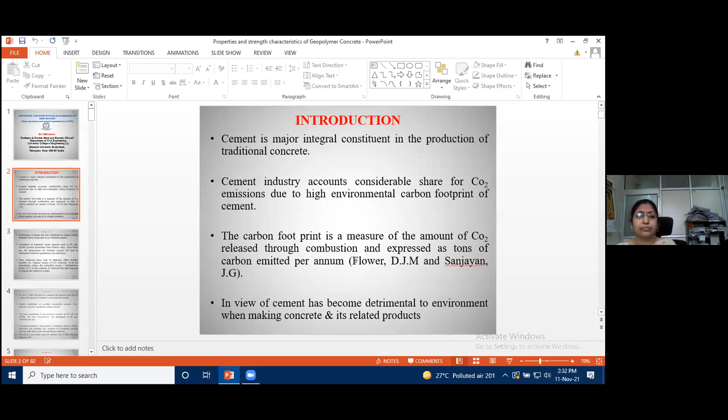He has been chairperson of ICI HYDC, Charminar Indian Concrete Institute, Telangana State, Hyderabad Center. Sir has published more than 70 papers in international and national journals and conferences, and has visited abroad for several guest lectures.

Sir holds memberships in different professional societies: ICI Indian Concrete Institute Life Member and Fellow Member, ACCE Association of Consulting Civil Engineering Life Member, and Institute of Engineers Fellowship.

Sir's awards and honors include the Best Guide Award by ICI and ACC National Level Cube Testing Competition in 2016, and the Best Academic Award by Smart Infra Engineering Services Trust on 2017, September 15.

Sir has edited many conference proceedings and books, and has done many consultancy works. He was nominated by Osmania University as a governing body member to Samskriti Institute of Business Management.

Sir was nominated by the Institute of Aeronautical Engineering, affiliated to JNTUH, as chair BOS in Civil Engineering member in September 2019. He is an editorial board member for the Journal of Building Engineering, a peer review journal, since August 2020, and also a National Advisory Committee member for the International Conference on Recent Advances in Civil Engineering Infrastructure.

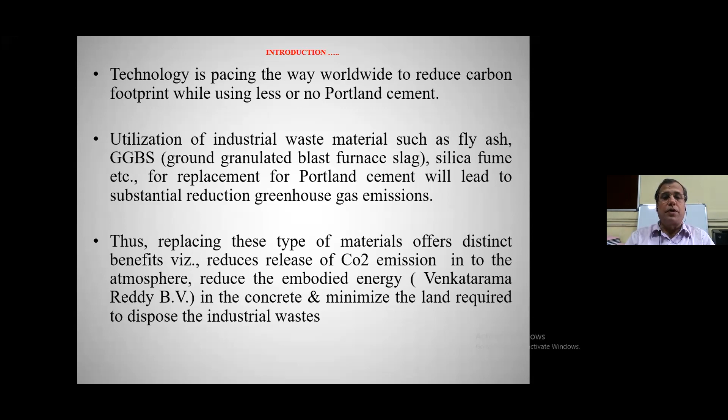Several researchers have done studies on geopolymer concrete using temperature limitations, producing the heat of hydration by giving temperatures. But that can be eliminated by using GGBS here, and I'll be explaining those things to you.

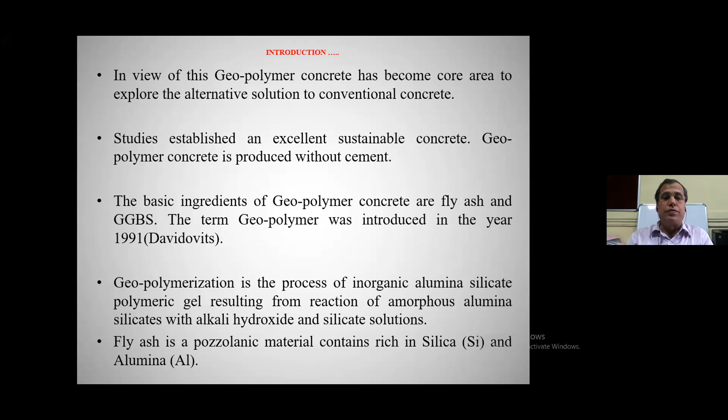Really, to get the heat of hydration, we need to have temperature. In concrete we have calcium silicate hydrate gel, which is the strength compound. To get this, we need proper curing in the concrete, and geopolymer concrete means we are putting 100% fly ash. When we are putting 100% fly ash, we need temperature. When we want to have temperature, we have problems, limitations. So to avoid this, we have selected GGBS as a replacement material to make effective geopolymer concrete in ambient curing conditions. We need not go to temperature curing, provided we are using GGBS into the concrete.

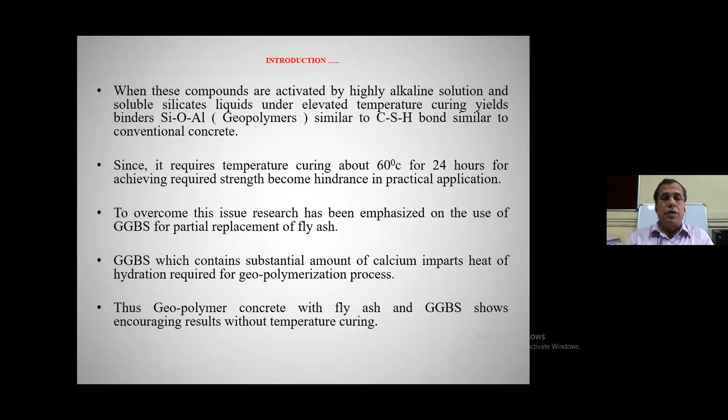So to start with, geopolymer concrete is a special concrete, and I told you why this special concrete is required.

Special concrete is required because we want to make our structures more durable in certain places, like water retaining structures, water tanks, and swimming pools. In these areas, we always have a problem of leakage and dampness, so we need a complete solution, and to some extent we must make durable concrete, for which geopolymer concrete is required.

This comes under special concrete because we are using 100% fly ash in this. Need for special concrete because we want to make our structures more stiffer, more stronger, more durable.

Applications of geopolymer concrete, as I told you, include water tanks, dam structures, drainage areas, and swimming pools. In such areas you can use geopolymer concrete in future, so that our leakage problem will be minimized.

The density of geopolymer concrete is very good because of the polymerization action, and because of the good workability from the alkali activators, which I'm going to explain to you—the different materials with which we are getting very good density.

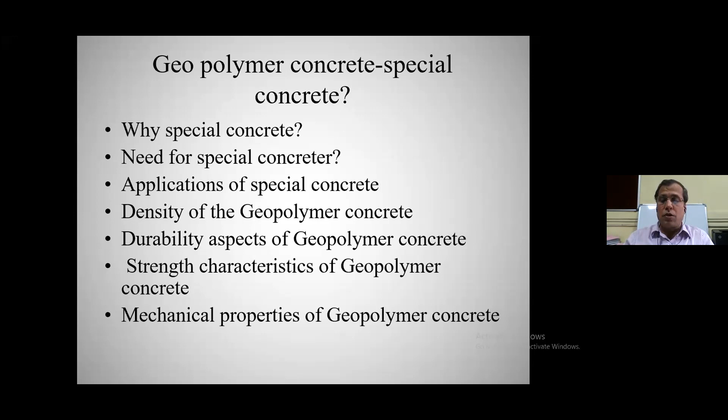Not only that, geopolymer concrete can be used with different coarse aggregate materials. It is also being done with recycled aggregate—our students are working on recycled aggregate geopolymer concrete, and we are getting good mechanical properties and strength characteristics. This is a sustainable material because fly ash is freely available at thermal power stations abundantly, and those materials can be used.

Types of special concrete are: fly ash concrete, fiber reinforced concrete, bacteria concrete, self-curing concrete, ultra high strength concrete, self-compacting concrete, and geopolymer concrete.

What are special concretes used for? A normal concrete with which we can survive—but why are we making special concrete? Special concretes are used for special applications like tunnel structures, water retaining structures, raft foundations, and wherever you have high load carrying capacity bridges and high-rise structures, for which we need all these special concretes.

Fly ash is one of the materials which is a very good sustainable material, because fly ash fineness is more than cement fineness. This fineness is very good for fly ash, and it helps in densification of concrete, achieving good target strength, minimizing temperature problems in concrete, and giving better durability in concrete. So this is a very good special concrete, fly ash based concrete.

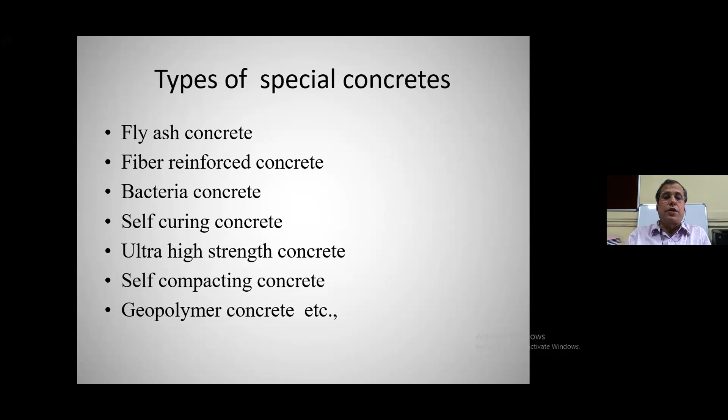These are all the things that I wanted to tell you about special concrete.

Now we are having the materials used for geopolymer concrete. Fly ash can be used, along with fine aggregate, coarse aggregate, water, sodium hydroxide, sodium silicate, potassium hydroxide, and potassium silicate. The combinations we can use are: sodium hydroxide with sodium silicate, or potassium hydroxide with potassium silicate.

But the thing is, sodium hydroxide and sodium silicate is a little cheaper, while potassium hydroxide and potassium silicate will be costlier. That's the reason why almost all researchers select the first option only. We can select the second option too, but why unnecessarily give more cost for the material? Of course, combination of the above materials can be called the alkaline liquid, the combined material.

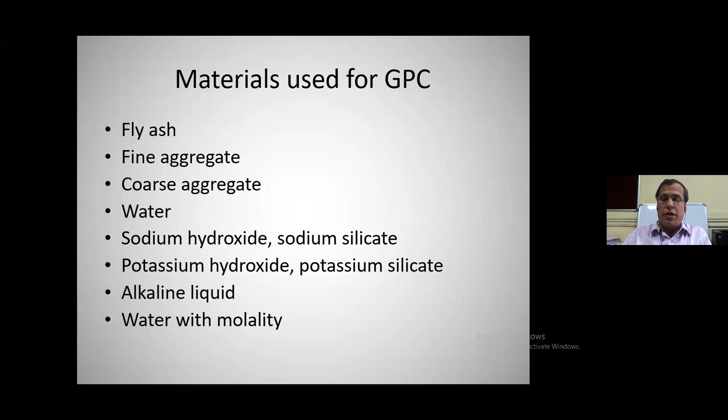Then water with molarity we use. And of course, we have very good workability. As I told you, we can observe slump, compaction factor, and cohesive mix. Good slump, good compaction factor, cohesive or uniform mix, good quality due to different ingredients and materials present, the alkali activators as I told you. Uniform matrix in fresh concrete state, good density, and good particle packing etc. is possible in geopolymer concrete.

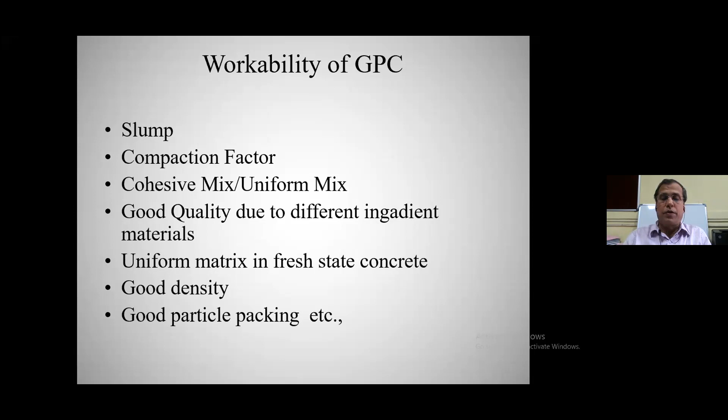For curing, 100% fly ash based GPC requires 60 to 90 degrees temperature curing, but GGBS based concrete requires approximately 43 to 50%. That is the percentage of GGBS required in GPC. Beyond that, it again decreases the strength. This is what we observed in our investigations. Hence it's preferable to go with ambient curing with the above GGBS 43 to 50% in fly ash.

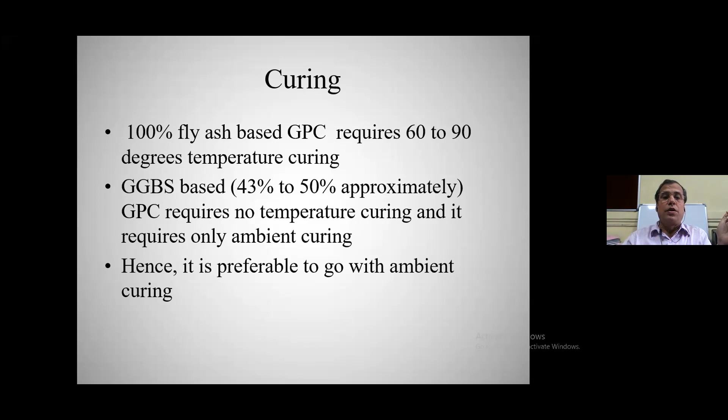Attainment of strength, more rate of hydration due to alkaline liquids, more hydration process due to GGBS, more rate of gain of strength at 3, 7, 28 days, because of alkali activators and faster heat of hydration. So we are getting maximum strength even at 7 days sometimes for very high strength concrete. But it's better to keep it till 28 days so that our normal FCK is obtained at 28 days.

That is what we have observed, and we are also waiting till 28 days for the specimens. It is not necessary for the specimens to cure under water. It is only ambient curing - you can leave the specimens in the atmosphere after making them, and test after 28 days.

There are more advantages in low grade concrete and less advantages in high grade concrete, as I told you. High grade concrete is more brittle in nature. Therefore, the parabolic portion of the modulus of elasticity behavior in geopolymer concrete relates to the elastic proportionality limit. You can see more proportionality limit portion for high strength geopolymer concrete.

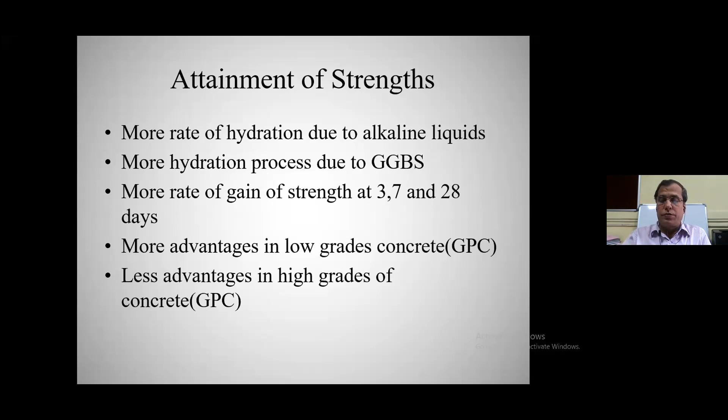This is the observation, and you can get the strengths after 28 days. You can also see short-term and long-term properties. Short-term properties are very good - after 28 days we are able to get the target strengths. For long-term properties, some researchers have done durability studies which are very good, with no negative effects reported for geopolymer concrete as of now by researchers worldwide.

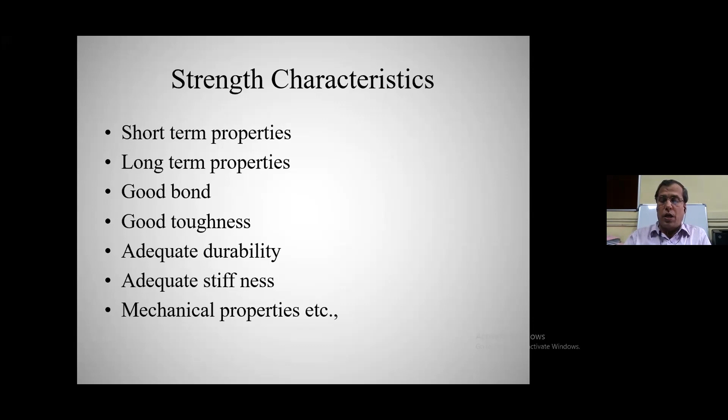So good bond, good toughness, adequate durability, adequate stiffness, and good mechanical properties - all these are achieved for geopolymer concrete.

It is necessary that we establish the grades, and some of our research scholars did work for several grades, because if you do not establish the grade, it is highly difficult to know the proportions and the replacement percentage of GGBS etc. Several researchers, including our MTech and PhD students, have done work on M20, M60, and 70, 80 is also in progress. I am not reporting the results of 70 and 80, but till 60 we have some results from our MTech students and PhD scholars, so I am going to show those results to you. Good mechanical properties - all mechanical properties are very good.

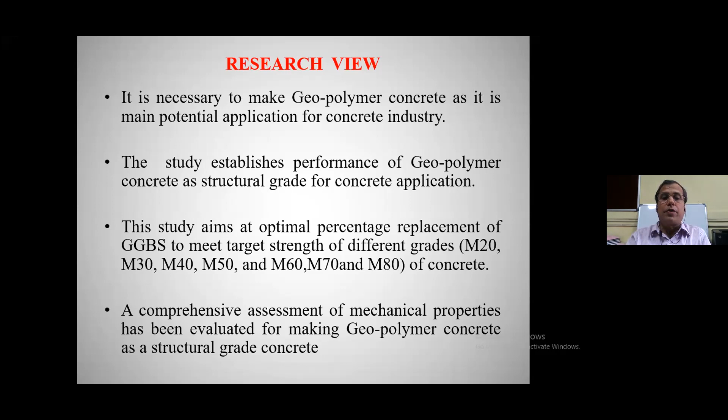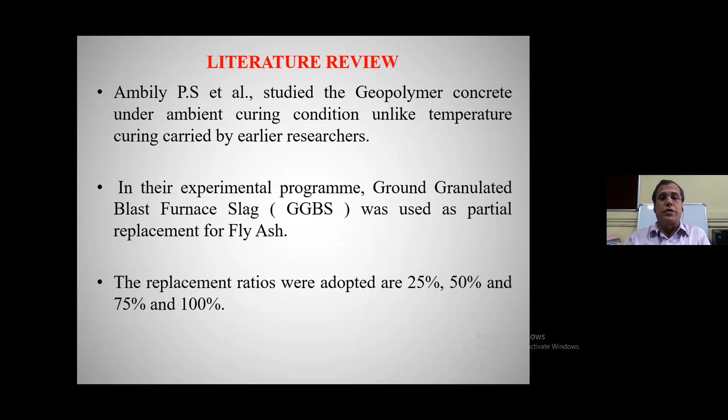Some of the literature reviews also say the same as what I told you - GGBS is being used, but not for a particular grade. They have used some percentage of GGBS and gotten some amount of strength, but have not reported that this particular proportion is for this particular grade. Several people have replaced 25%, 50%, 75%, 100% fly ash with GGBS, but they have not really concluded with the grades. That's what several researchers have done, I don't want to repeat all these things.

So the experimental program which was planned and conducted, the studies at our department also - I want to show you some of the results for M20, M60, M70 and M80 also.

GGBS replacement that our students have taken up to M60 is 9% to 43%, and even up to 50% for very high grades like 70 and 80. But up to M60, the 9 to 43% GGBS replacement gets us the required target strengths.

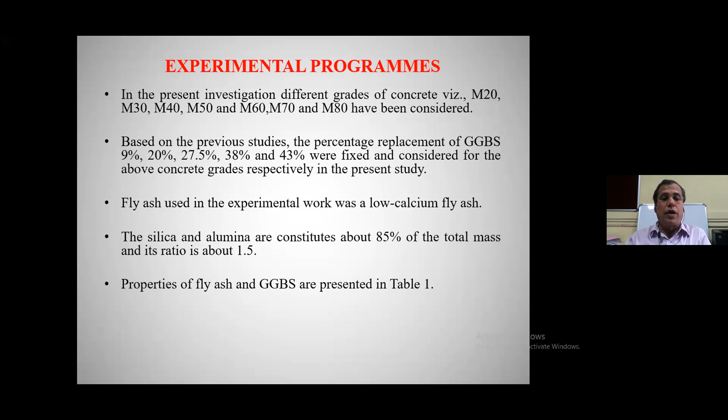We have basic advantages here. Alumina and silica are considerably high, about 85% of the total mass of the fly ash, and that is the reason why we are able to get the required strength.

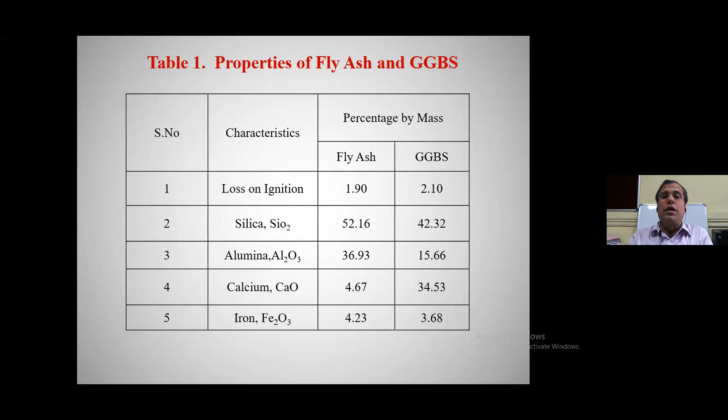You can see some properties of fly ash and GGBS. Loss on ignition is 1.9 for fly ash and 2.1 for GGBS. Silica is 52 for fly ash and 42 for GGBS. Alumina is 36.93 and 15.66 respectively. This is how GGBS helps us get better heat of hydration, so that we can achieve ambient strength without going for temperature curing.

The materials used here include locally available river sand, whose properties like specific gravity and fineness modulus are given. Natural fine aggregate and natural coarse aggregate can be used directly, no problem. But a separate mix design procedure needs to be followed, for which we need sodium hydroxide and sodium silicate, or potassium hydroxide and potassium silicate, any of these two combinations, to get the required target strength for a given grade.

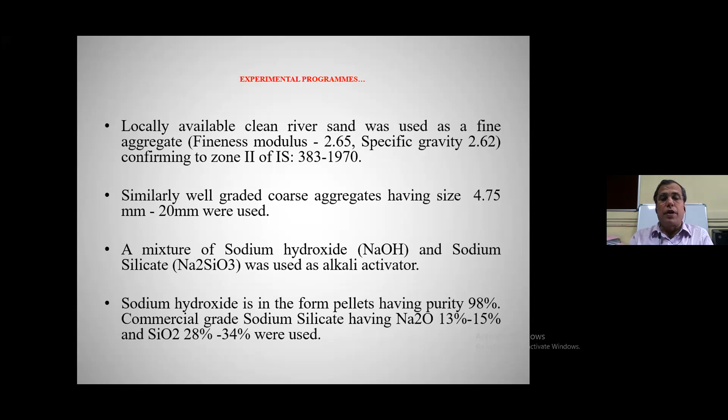Typically, the common alkaline liquids used in geopolymer concrete are sodium hydroxide and sodium silicate, or potassium hydroxide and potassium silicate. But it is always better to take the sodium option so that your cost is minimized. Otherwise we will unnecessarily go with high cost, which is not preferable for any construction or mix design.

We have a process for making the materials, sodium hydroxide and sodium silicate, for which we purchase flakes with 98% purity from local suppliers. Sodium hydroxide solution is prepared by dissolving the flakes according to the required molarity. 1 kg of 8 molarity sodium hydroxide needs a certain amount of water and 262 grams of flakes. There is a standard procedure to prepare and mix the material 24 hours before.

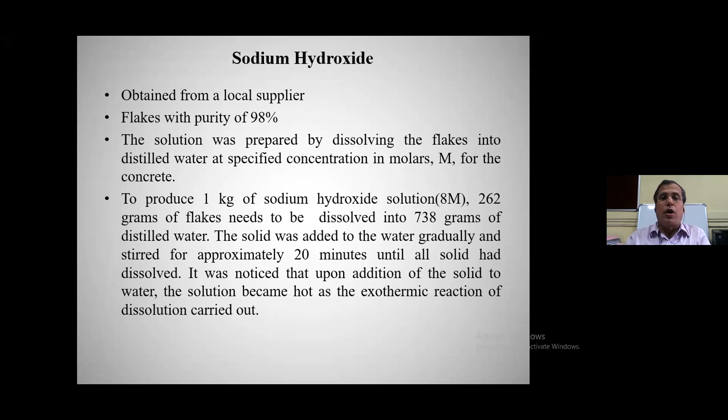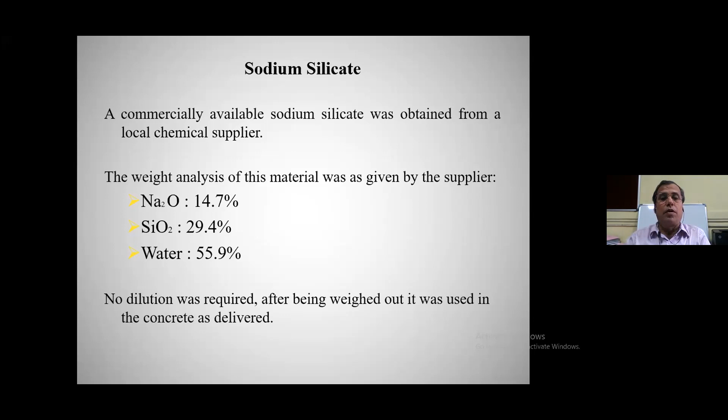Suppose you are casting tomorrow, you need to add all these materials today. There is also a weight analysis for the materials used: Na2O is 14.7%, SiO2 is 29.4%, and water is 55.9%. This is the procedure given in the mixing process of geopolymer concrete.

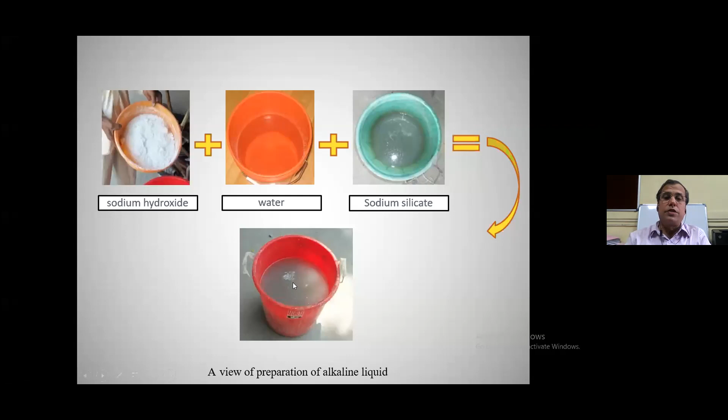This is how the proportions look. The different materials you add are sodium hydroxide, water, and sodium silicate, which together give you the alkaline liquid. At the bottom you can see the alkaline liquid made of sodium hydroxide, sodium silicate, and water.

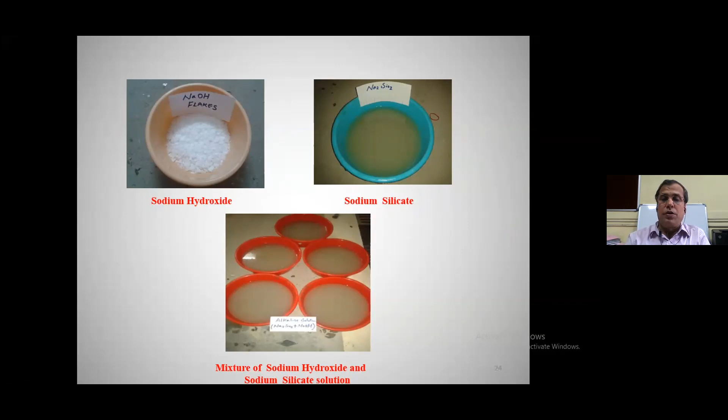Here's another picture showing the same thing, but with different proportions for, say, 3 cubes, one percentage, another percentage, and so on. You can plan this for different grades by mixing the material 24 hours before the planned casting, one day before, including the fly ash and GGBS materials.

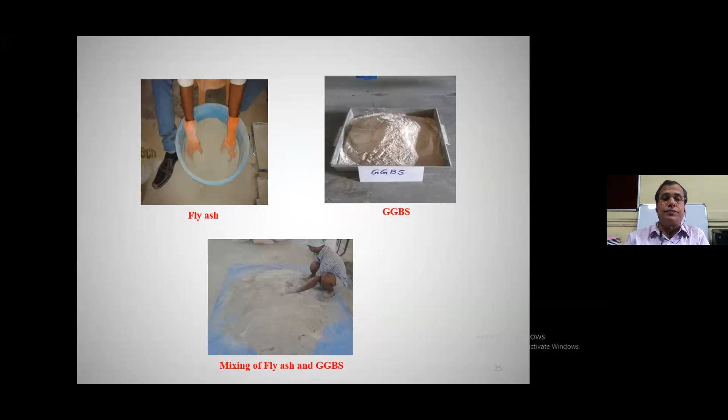This is how both materials are mixed. It is a beauty that our fly ash and GGBS are very fine, and with these finer materials we get very good workability. It is like normal mixing: first we put coarse aggregate, then fine aggregate, then fly ash or cement, and mix it in a dry state.

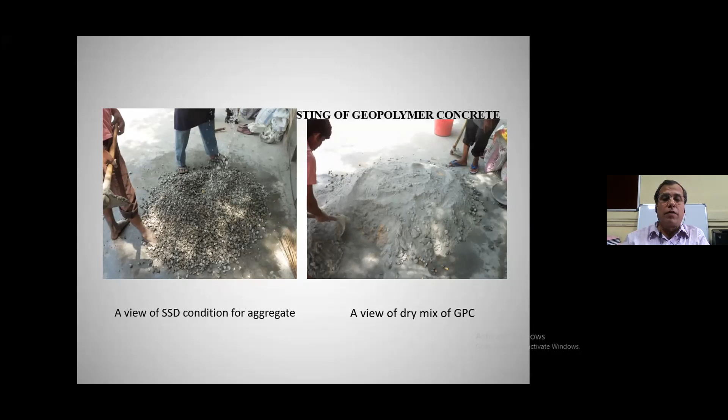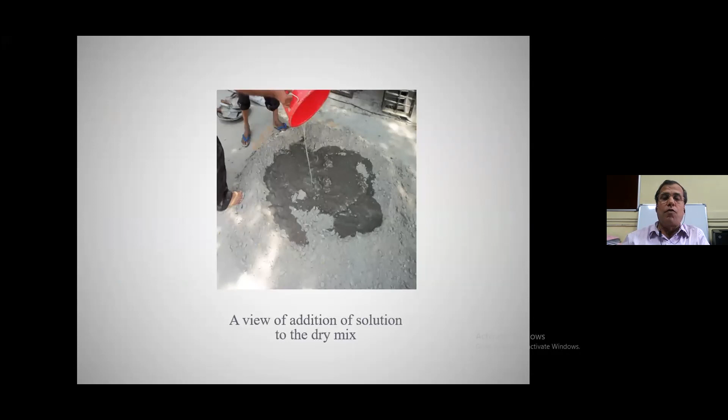Then we add the water or alkaline liquid solution after the dry mix. This gives the liquidity or lubrication we can achieve in our concrete, so there is no scope for any honeycombing or gaps. It is a very beautiful concrete.

Its color is also like normal cement concrete, gray. It is very good, and if you can do a good mix design, I am sure you will get good strength.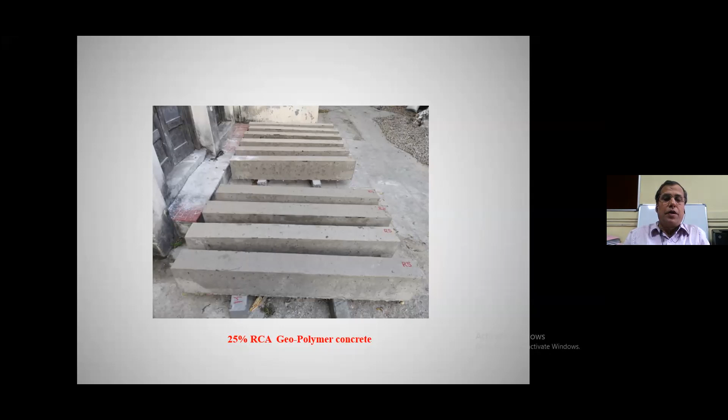Our student is going to start now testing for load carrying capacity and moment carrying capacity of these beams. The beam is 1.5 meter, 1500 mm by 230 mm by 150 mm.

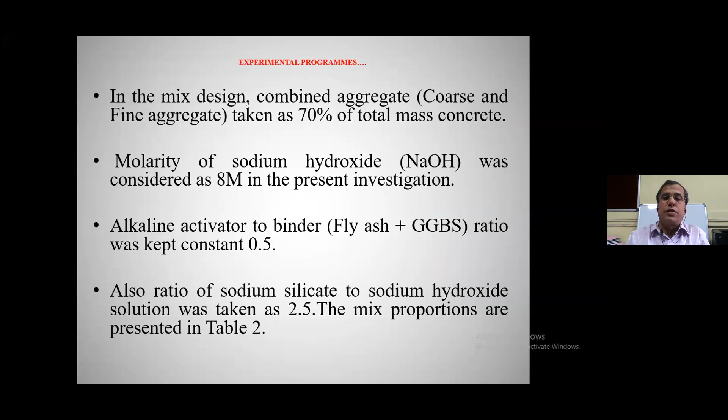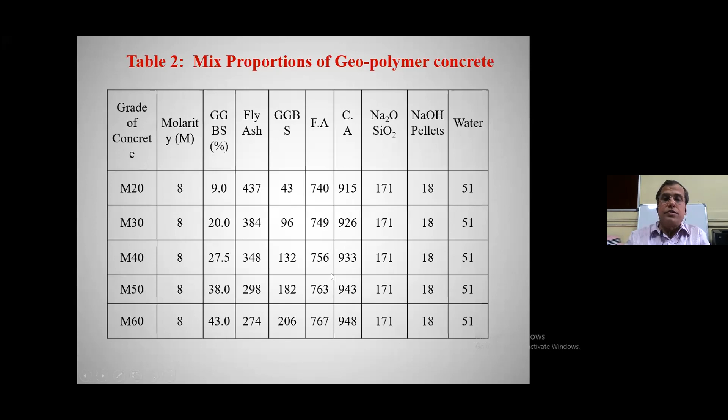Improved workability is also very good, as I told you earlier, so I think we need not discuss this further. This is one of the mix designs with 8 molarity, and GGBS percentage is 9 to 43. This is again done by our research scholar, with fine aggregate, coarse aggregate, sodium hydroxide flakes, pellets, and water taken for these grades. This is the proportion of the mix trials that we got for M20 to M60. This procedure I have already explained to you.

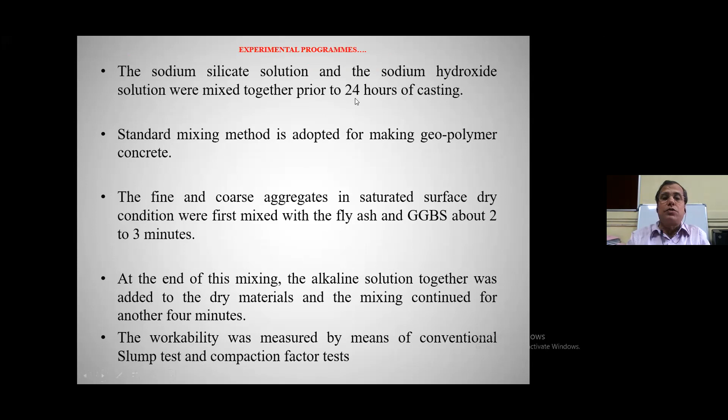24 hours prior, we have to mix all those materials, as I told you. We need to have a minimum temperature of 25 to 27 degrees, which is just room temperature. So it means in the ambient situation only we are going to get this.

Earlier we have done research at our laboratory. When GGBS had not come, we used to make the geopolymer concrete in midsummer when temperature is around 50 degrees, and we used to keep all our specimens outside after making them, exposing the cube, cylinder, and prism specimens to that temperature. We were struggling a lot. Then when GGBS came, we started using it, and in ambient curing situation only we are able to get the results.

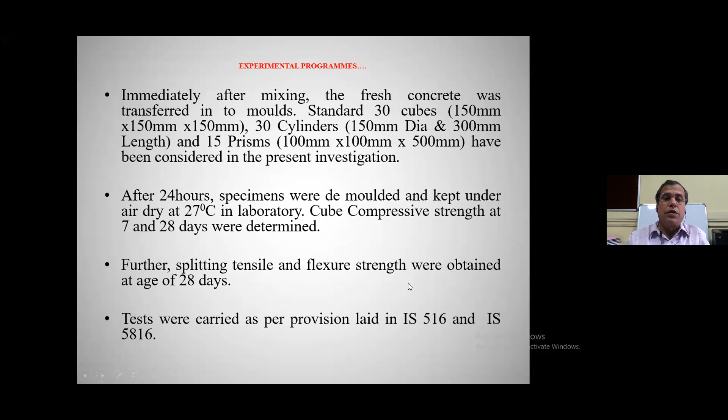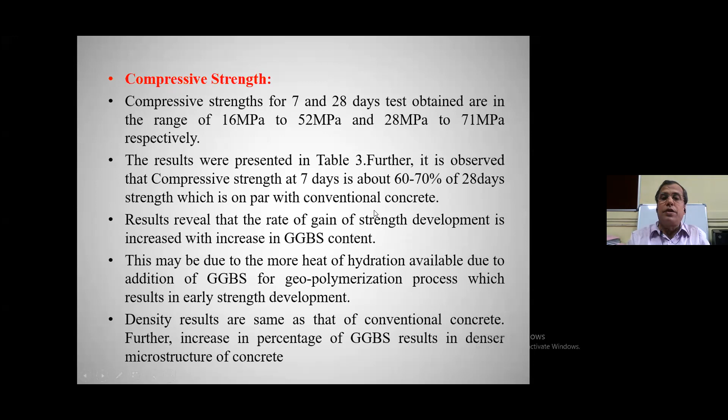These are our standard cube, cylinder, and prism specimens, tested at 28 days according to the standards. The compressive strength we got for M20 grade concrete achieved the target value of 28, and for M60 it was 71. So this is in the range of 28 to 71, meaning all the target strengths are being achieved. GGBS is working very well, and even the 60 to 70 degree temperature requirement is eliminated by using GGBS. These are the strengths we got, 28 to 71.

So what is the target strength for M20? We know it is 26.6, nearly 27, so we are getting here more than the target required for M20. Any grade you take - M20 means 30, 30 means 40, 40 means 50, 50 means 60, 60 means 70 - plus 10 MPa is our target strength when you use the target mean strength formula: Ft equals FCK plus T into S, where FCK is characteristic compressive strength, T is the statistical constant for 20 millimeter size aggregate, and S is the standard deviation of that particular grade of concrete, with which we are supposed to get plus 10 MPa strength for every grade.

When you are taking 20, 30, you should nearly get it - 28 means the target is 27, 26 point something you are reaching. That is a fundamental thing we can remember. When designing one particular grade, you should get plus 10 MPa - that is our target strength, and we achieved those target strengths for all grades with these particular replacements of GGBS.

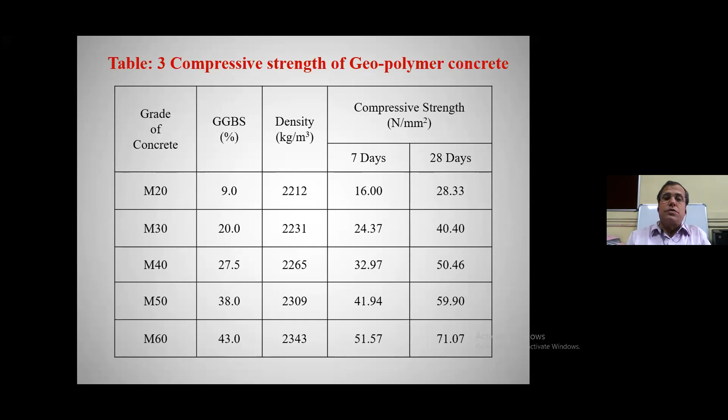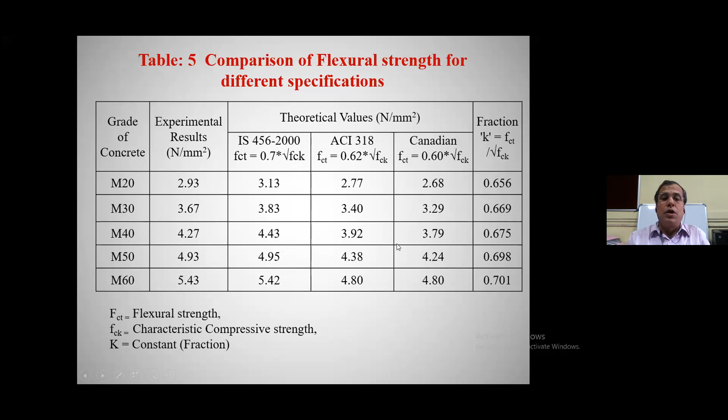These are all the test results I told you - good in compression, good in splitting tensile strength, good in flexural strength, and good in modulus of elasticity at M60. This is how we can understand all the material characteristics, and they have also tested with other country codes, and the flexural strengths have been verified with other country codes, well within the limits.

After making the geopolymer concrete, we cannot just leave it - from M20 to M60 or 80, we cannot leave it alone like this. We have to use this concrete for design. When we want to use this concrete for design, we need to have a procedure again. So what is the procedure that we require?

Normally, we design RC beams for ultimate moment of resistance using our conventional formula: Mu equals 0.138 FCK BD square or 0.133 FCK BD square. Earlier we used 0.138 FCK BD square, but now our formula is 0.133 FCK BD square, because we are not using 415 grade steel or 250 grade steel. We are using Fe 500, 550, 550D.

Why are we using these steels? These are advanced steels with good ductility, and the manufacturing process has changed. Therefore we now use Mu equals 0.133 FCK BD square, not 0.138 FCK BD square, for which we have well-defined equations. But this 0.133 or 0.138 is for normal conventional concrete.

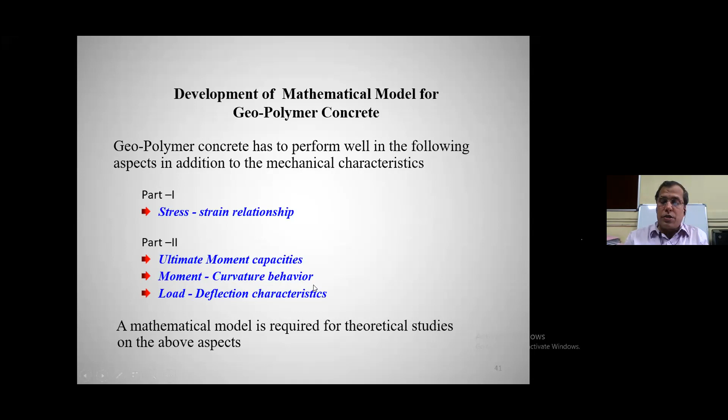This is done to arrive at the moment of resistance equation. Using stress-strain relationships, we can get ultimate moment capacities, moment-curvature values, and load-deflection characteristics for geopolymer concrete. This is the stress-strain relation for geopolymer concrete that we obtained.

We normalized the stress-strain relations. A smooth curve resulted from non-dimensionalizing and normalizing the values from 10% to 100%. We predicted the equation of this parabola: y equals ax by 1 plus bx plus cx square, that is f equals a epsilon by 1 plus b epsilon plus c epsilon square. Here y is stress and x is strain. We selected this equation to get the stress-strain relations in non-dimensional form.

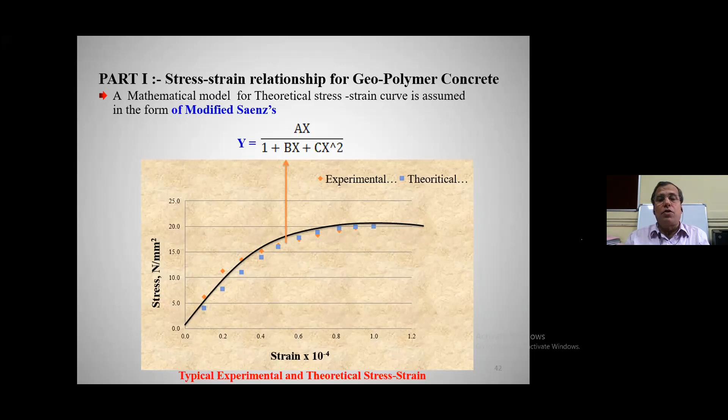First we normalized the curve, keeping values at 0.1, 0.2, 0.3, 0.4 up to 1, to get a smooth curve. From our experimental values, we predicted this parabolic curve for a grade of concrete, but this curve is normalized, and it will vary from grade to grade.

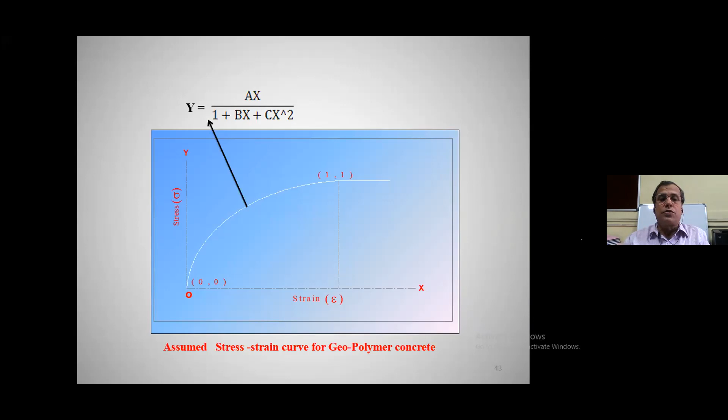This curve value varies from grade to grade, and for each grade, once obtained, Mu equals 0.138 or 0.133 FCK BD square can be derived by integrating the equation of this stress-strain curve. We get the area of the stress block under the curve, and from this area we get the compressive force. That is how the investigation was done for various grades.

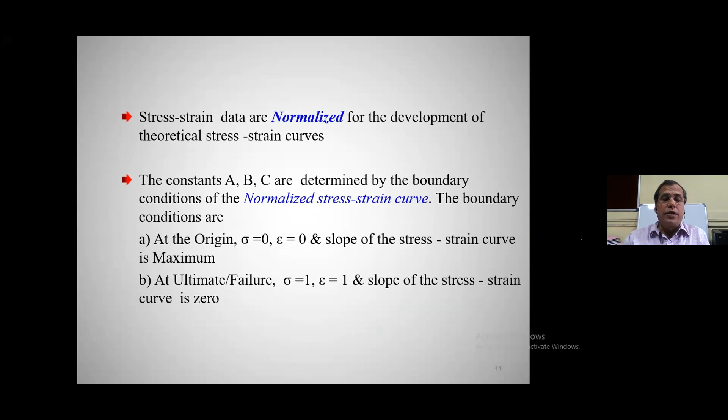F is nothing but sigma, which is stress, and epsilon is strain. Boundary conditions were given for the ultimate value, starting from 0.1, 0.2, 0.3 up to 1, and similarly for strain. Suppose 25 MPa is obtained for M20 grade concrete: 25 MPa is normalized to 1, 90% becomes 0.9, 80% becomes 0.8, and so on, normalizing the ultimate values to obtain the stress block parameters.

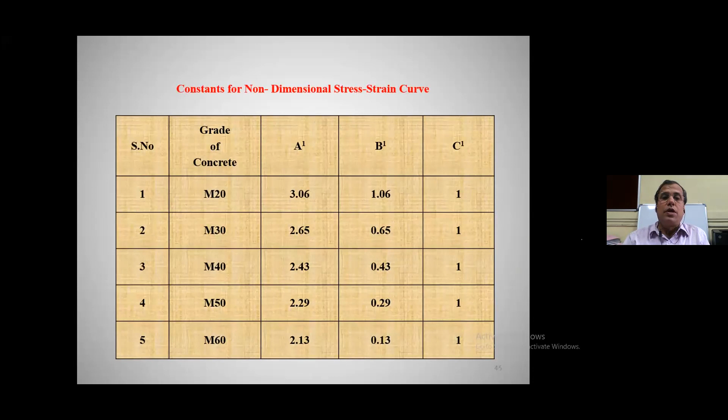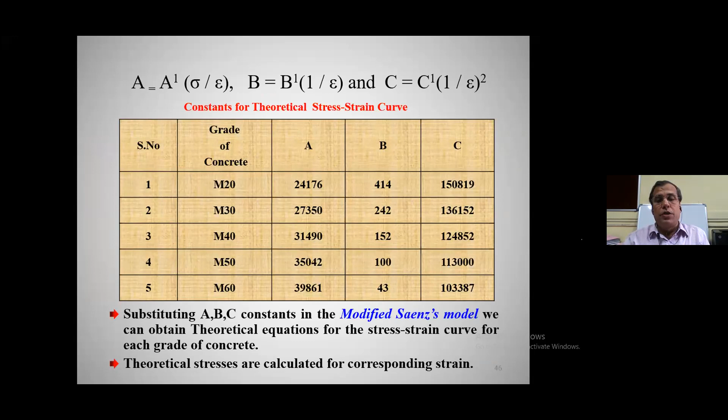In this equation you have A, B, C constants, and these constants are arrived at for different grades of concrete using the procedure. A is calculated as A dash sigma by epsilon, which is stress by strain; B is calculated as B dash 1 by epsilon; and C is calculated as C dash 1 by epsilon square. These values of A, B, C and A dash, B dash, C dash are obtained for every grade, normalized, and then verified.

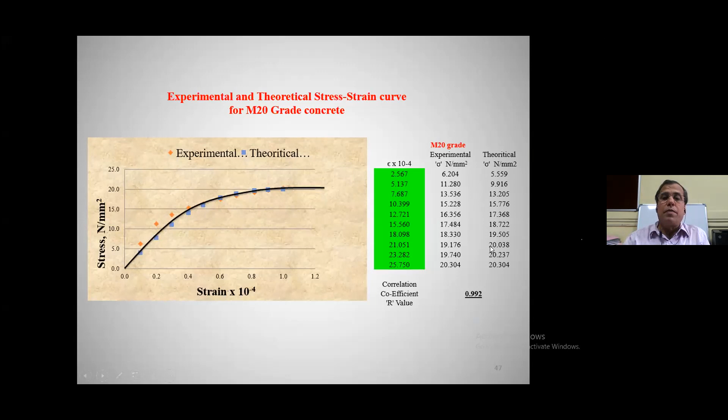This is the ultimate value, as I mentioned, with normalized values at 10% intervals for each level, obtained for all grades. The point here is that we have conventional stress block parameters like alpha, beta, gamma, xn by d, depth of neutral axis, compressive force, and the center of gravity of the stress block from the compression zone, giving moment of resistance as 0.133 FCK BD square.

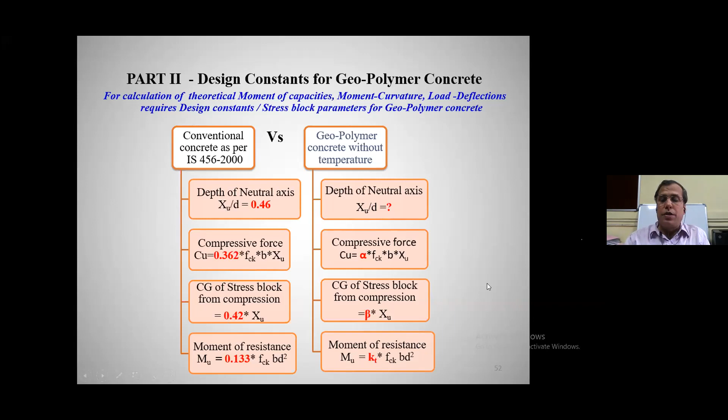We have this for conventional concrete, and we need the same for geopolymer concrete, for which the investigation has been carried out. The equation is idealized, and the M20 grade concrete stress-strain curve is superimposed onto the RC section.

When we superimpose the strength characteristics of M20 grade concrete onto the RC section, then on that RC section, whatever moment of resistance we are going to get is for that geopolymer concrete, for which we have superimposed all the stress strain curves onto the RC section one by one for M20, M30, M40, M50, M60.

We calculated C1, C2 compressive force in parabolic section and compressive force in rectangular section. This stress strain curve is divided into rectangular and parabolic parts, and compressive force C is nothing but C1 plus C2. The depth of neutral axis for ultimate load has been arrived at.

So that depth of neutral axis we can know, and then tensile force we can know from the geometry of our calculations. Similarly, compressive force we can get. If we get compressive force and tensile force, we have also taken a balanced section.

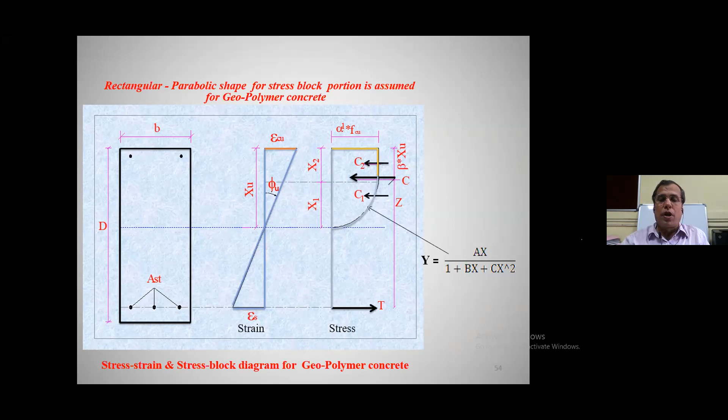For our experimental work, and also theoretically, a balanced section for this theoretical case. So that moment and curvature, this moment and curvature we can correlate, and we can really compare the values for which these stress block parameters have been taken. These are the constants which I told you, and this is how a section has been taken, RC section.

This is the expression for compressive force. I have shown you the beam, that beam is 1.5 meter beam. Experimentally, moment is arrived at. For example, with the ultimate load, moment we can calculate, with 2-point load. Moment we can get it with the reactions. Force into perpendicular distance is your moment of resistance, we can get it.

But theoretically also we should get it, so theoretically also the same geometry has been assumed. For the same geometry, whatever stress strain curves are being superimposed onto the RC section, theoretically compressive force and tensile forces have been arrived at. To arrive at the theoretical compressive and tensile forces, this process has been done.

B is 150, D is 230, and L is 1500. The compressive force is alpha 1 FCU B into XU, where you are having area of the stress strain curve, that is AB, given by AB equals alpha 1 FCU epsilon U. Alpha 1 is also calculated, and then the expression of the compressive force is arrived at like this from these equations, where AB is the area of the stress block under the curve, area of the stress strain curve.

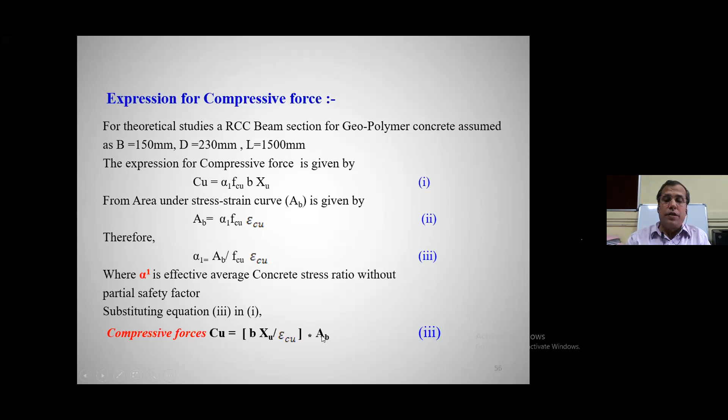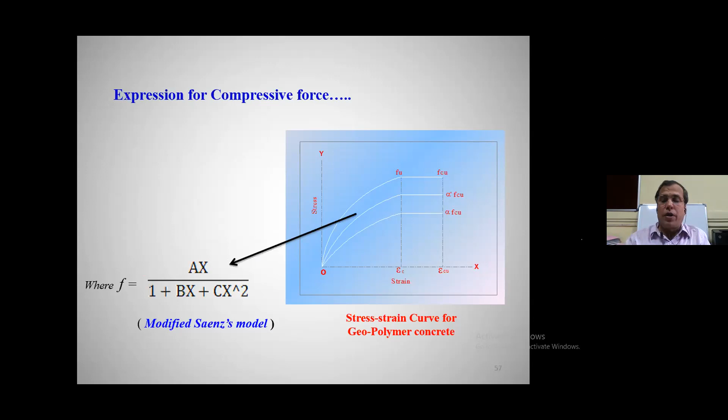To get this area of the stress strain curve, because it is in parabolic shape, we need to definitely integrate this equation. If we are able to integrate this equation, we are going to get the compressive force area, and if area is known to us, we can get compressive force. So AB needs to be integrated, this F, stress.

We have taken an equation, stress equals AX by 1 plus BX plus CX square. It is nothing but F is equal to A epsilon by 1 plus B epsilon plus C epsilon square. This is the expression that we are going to get.

Why I'm explaining all these things is because we are getting the compressive strength of geopolymer concrete, and unless we calculate the design parameter of that particular M20 grade concrete, we are not able to design the RC beam. We need to design an RC beam of that particular M20 grade concrete in RC section also. Our job is not just to arrive at the target strength of the geopolymer concrete and leave it. No, we need to show how you are going to design completely for RC section geopolymer concrete.

Compressive strength alone will not be sufficient; its behavior in RC section will also be different. To arrive at the uniformity and to get the correct design parameter, we need to compulsorily superimpose the plain concrete values onto the RC section, and we are supposed to arrive at the moment parameters also, for which we need to do all these things.

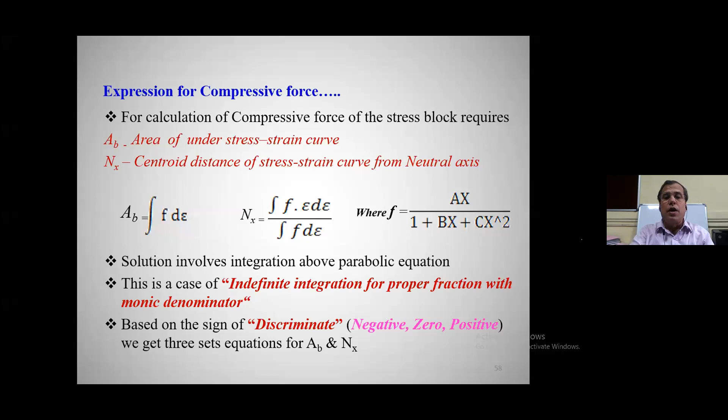This is what it is actually. So therefore, by integrating all these things, you are going to get an integration of this process. After you integrate this, you are going to get so many integrations. I'm showing here integral of F dx, integral of F d epsilon. F is nothing but y. Integral of y dx, that is nothing but integral of F dx, d epsilon means integral of F dx.

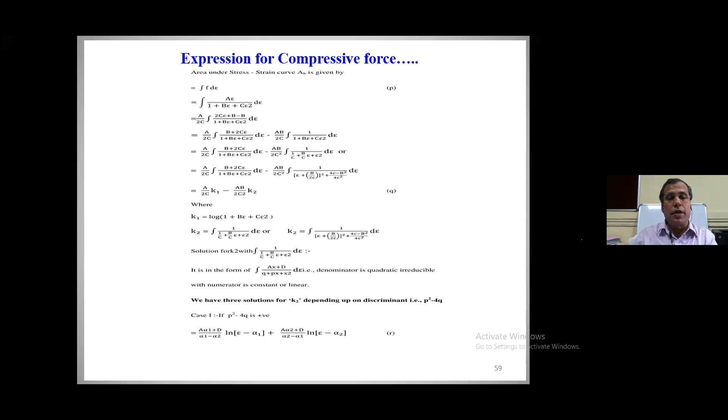Integral of F d epsilon means integral of F dx, or you can understand it as integral of y dx. We can integrate that, and in that you again have A, B, C constants. Those A, B, C constants are being arrived at, and similarly K1, K2 constants are being arrived at. Finally, by doing all these integrations, you are going to get a value of AB, the area, AB value.

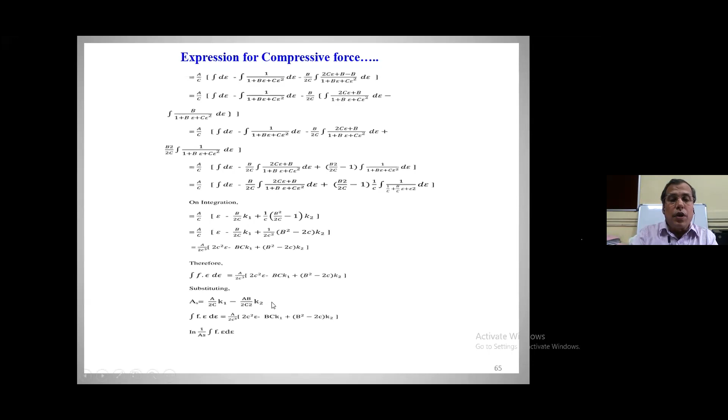You are going to get the AB value. This is the AB value. After getting the AB value, you are going to substitute it into this equation: Cu is equal to B into XU by epsilon Cu into AB.

What is this B? B is nothing but the breadth of the section of the beam, the RC beam. X is the depth of neutral axis. What is the depth of neutral axis? It is where compressive force is equal to tensile force. Strain in compression and strain in tension, we equate them and we get the neutral axis. That is nothing but the XU value. Once you get the XU value,

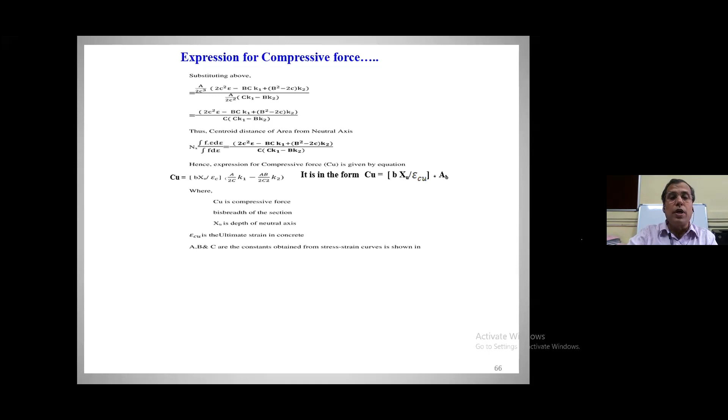the corresponding AB is there, and then epsilon Cu is also there - strain in compression, the ultimate strain in compression. So you can get the value of the compressive force. After getting the value of compressive force, you have to equate it. That is how you can arrive at the compressive force. And similarly, you can also obtain the tensile force.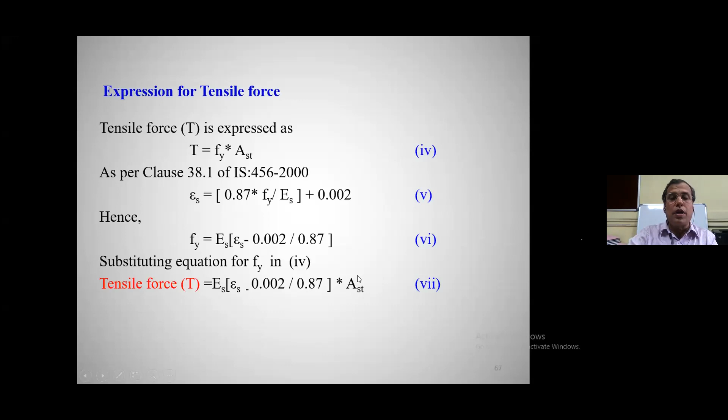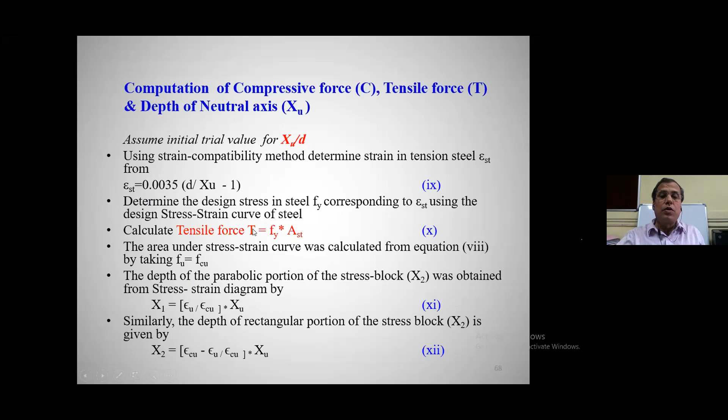of steel. The whole process here again is assuming an initial trial value of XU by D, the depth of neutral axis, at which you can get the strain in steel in this manner, and then you can calculate the tensile force and compressive force like this. Then finally, we get the value of the stress block parameter, that is XU by D, by equating compressive force equal to tensile force.

What is this compressive force? Theoretically, all these things I am telling you are theoretical, because experimentally we have all the values on the RC beam. On the RC beam, we have values of compressive force and tensile force, with which we can get the moment of resistance, bending moment, and all these things arrived at experimentally.

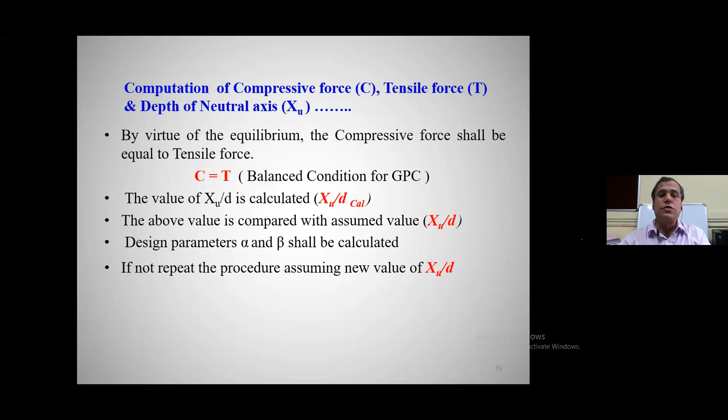But for the same geometry as that experimental RC beam, by considering the same geometry, we have calculated theoretically the compressive force and tensile force using this integration for compressive force, and by using the values for tensile force, we get compressive force equal to tensile force, and also get the depth of neutral axis.

How the compressive force values are calculated for M20 grade concrete is this: we have to generate all the depths of neutral axis right from load 1 to ultimate load. After generating all those values, we can say at 0.5, 0.49, 0.48, 0.47, 0.46, 0.45, 0.44, 0.43, 0.41, 0.42, 0.41 - at 0.41 you are getting your compressive force using these parameters. These compressive force values can be equated with experimental values, and you can say it's a good correlation. So this is the process to get the compressive force theoretically.

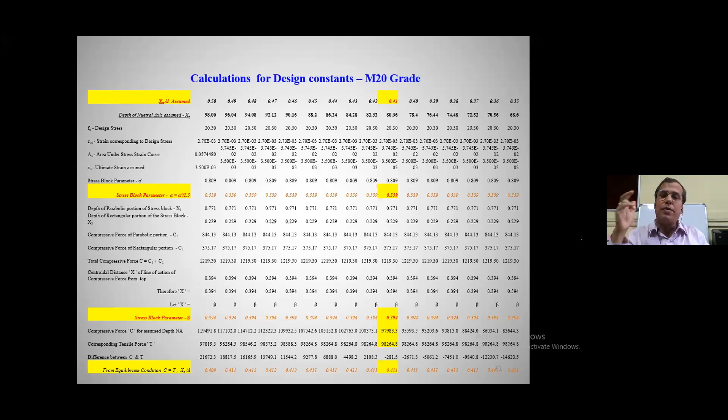Like that, we have to generate the XU by D, alpha value, beta value, then XU by D. All these things - alpha, beta, gamma, Xu by D - are your RC section properties. By superimposing your M20 grade concrete onto the RC section, theoretically you find all the stress block parameters, and from there you get the moment of resistance and moment curvature relationships. So using these values, you compare them with your experimental values - curvature, moment, theoretical moments, and all these things.

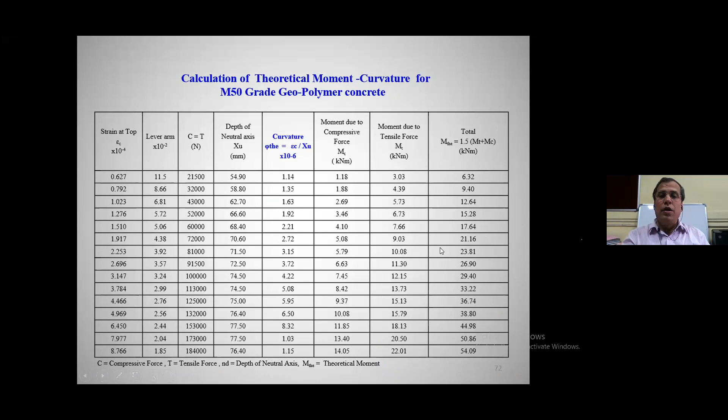Similarly, your shears etc. you can calculate. But my point here is, I will tell you anyway.

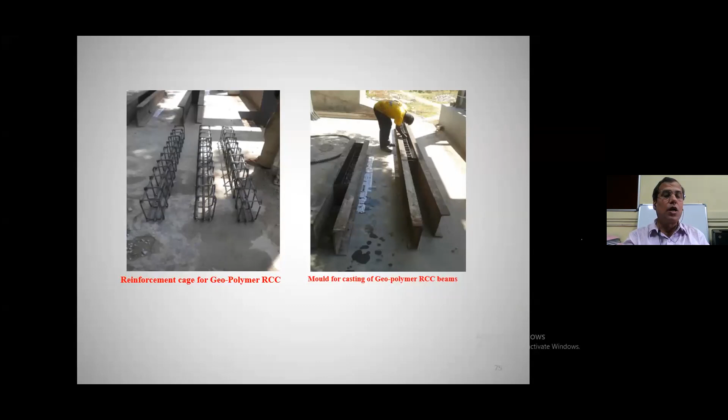These are the beams which are being cast for M20 to M80, and these are all the experimental setups that we have done at our laboratory by our MTech and PhD students. We have a loading setup like this, with 3 dial gauges at the top and 3 dial gauges at the bottom, and deflection meters at the bottom. This is to find the deflections, and the top one is to find the strain in compression, and the bottom one is to

measure the strain in tension, and these are all the deflections. So strain in compression, strain in tension, if you can measure with the dial gauges, you can at each loading rate find the stress block strain in compression and strain in tension. These two values you can make a linear variation from strain in compression ultimate to strain in tension ultimate. You get an intersecting point. At that particular intersecting point, you get a depth of neutral axis. And if you get that neutral axis, you can get a curvature. What is the definition of curvature? Strain in compression divided by depth of neutral axis. Strain in compression is your top strain, and depth of neutral axis is the point intersecting the top strain to the bottom strain. You get a curvature—that is nothing but curvature.

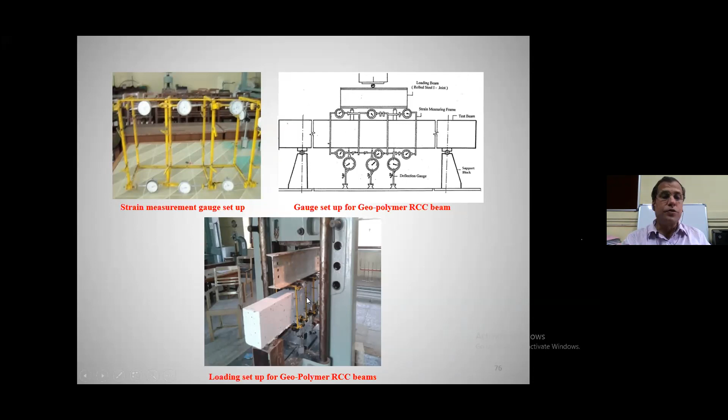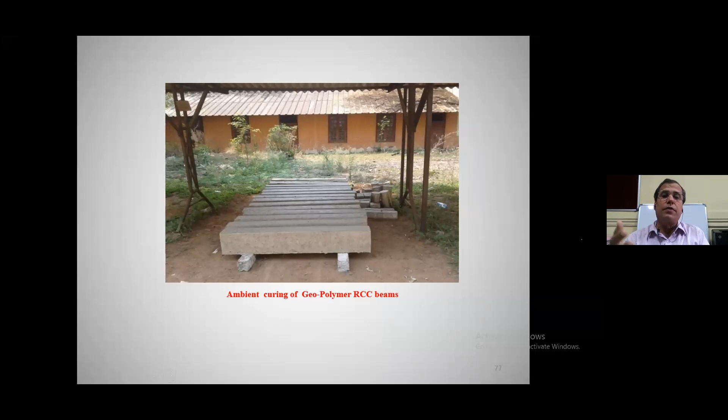This is what ambient curing of the beam means. The specimens are kept out, not in the water tank, not with gunny bags. Curing is done in an ambient curing situation. If rain comes there may be a problem, so we kept them under the shed, under the shade.

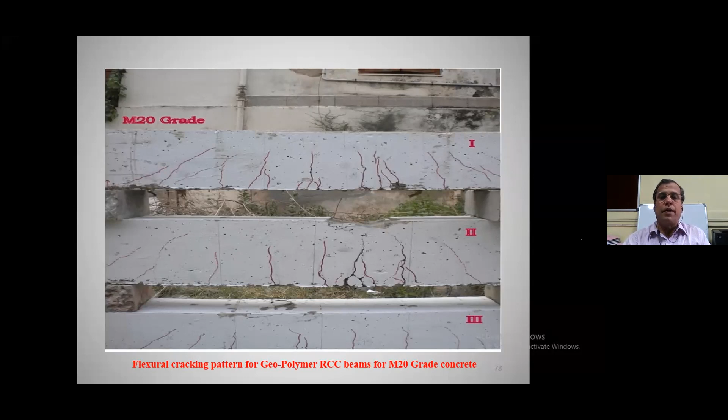This is a good design. Theoretical values should always be conservative. Experimental values should always be more than the theoretical values. This is well proven from the investigation—what we have done is correct. It means it is a sort of validation, we can say.

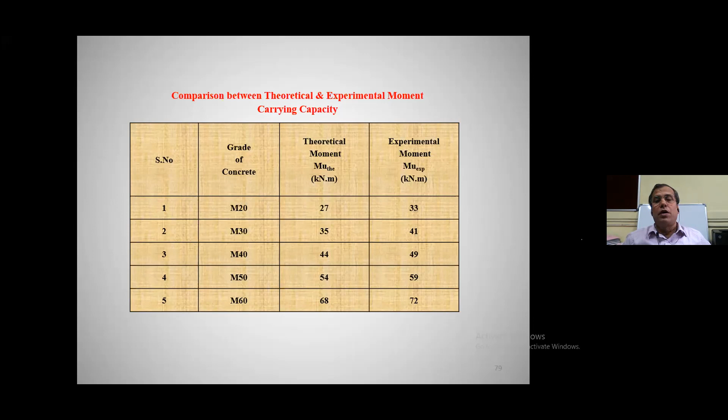If your value of M20 theoretical is 33 and experimental is 27, it means your design has failed. Whatever specimens you have designed, whatever stress-strain curves you have superimposed, are not meeting your requirement. That is the meaning. Here the theoretical values are less and experimental values are more, meaning they are well within the design, so therefore they are safe designs. We can say they are safe designs—they are not under-designed. This is the understanding.

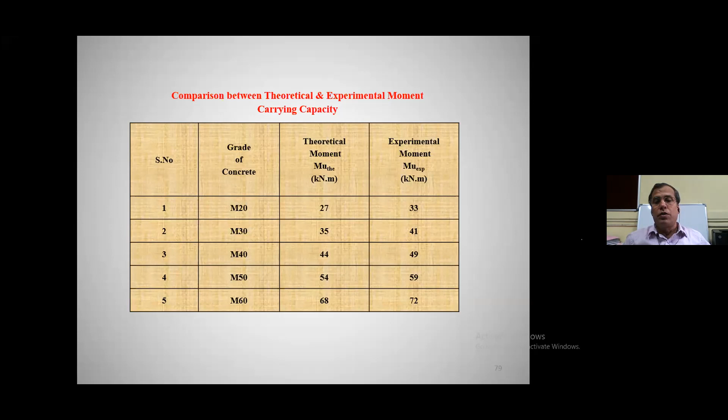So in all cases, all grades, theoretical is less, experimental is more. This is always good, so we can say our design is correct. This is how this geopolymer concrete, with its ingredients and characteristics, whatever values we obtained, really meet the target strengths of all the grades.

Now I have shown only up to M60 because M70 and M80 results are not out yet—it takes some time to consolidate them. Our students are doing that, so this is the improvement which is taking place. That's what I thought I should share with you all.

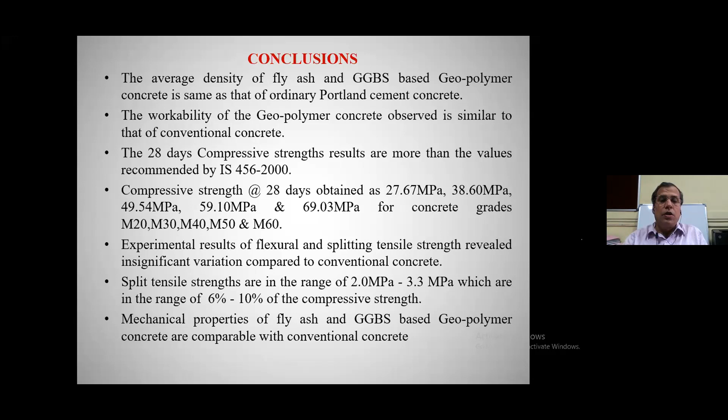So our plain concrete is good, and in RC, all M20 to M60 grades of concrete also really give very good comparison, and we are getting very good results. These results are comparable—all the theoretical values are conservative, experimental values are more than theoretical values. Therefore this is a good correlation.